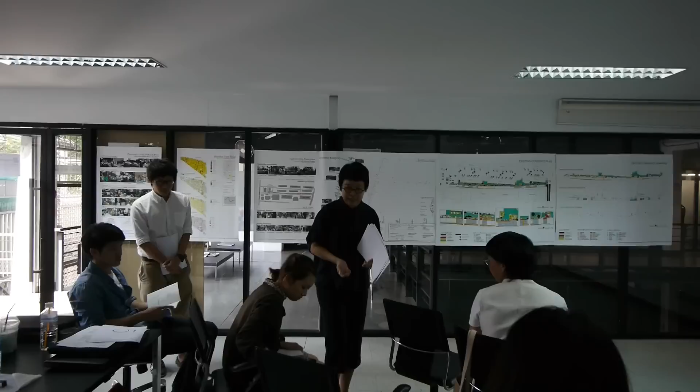Morning, everyone. Today I would like to present my project, which is domesticating the exterior space, where domestic life is going to share area or extend space.

I'm interested in the rich and poor, where high-income society has everything such as luxury life, but in low-income society they don't have that luxury life, yet they act as the main support to the whole society by doing jobs such as trash collector or motorcycle driver.

I found out that the best location for my idea is the Thonglor area, which shows so much contrast between high income society and low income society. There's a Thonglor police flat community located behind the police station flat.

It's located in between the two wall properties of Thonglor condominium and the police flat, which will be described later. You can see the atmosphere of the community, located in a strip line only 15 meters away from the main street of Thonglor, where you can see the activity they're doing, spending most of their time outside.

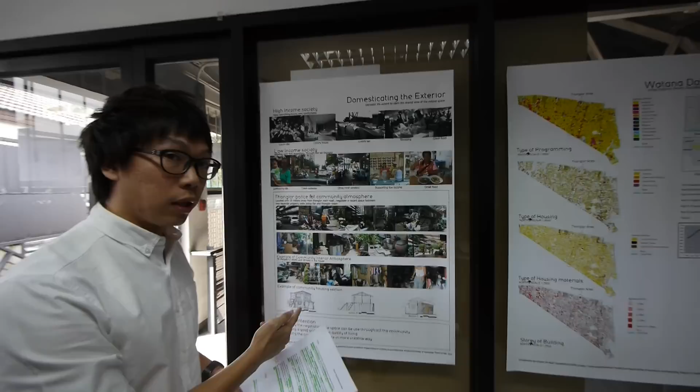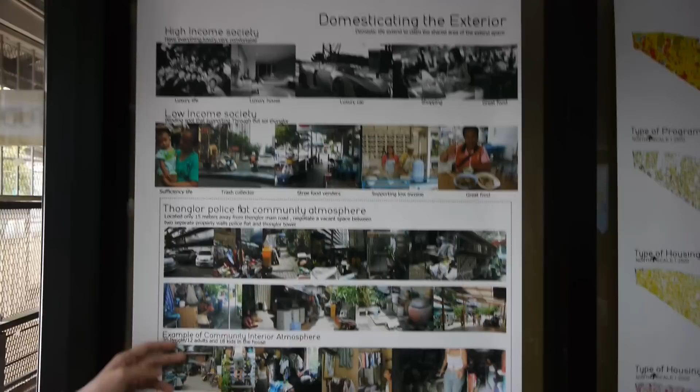This shows an example of the community interior atmosphere, where this house has 30 people staying inside, so they have to share the space within 5 by 4 square meters.

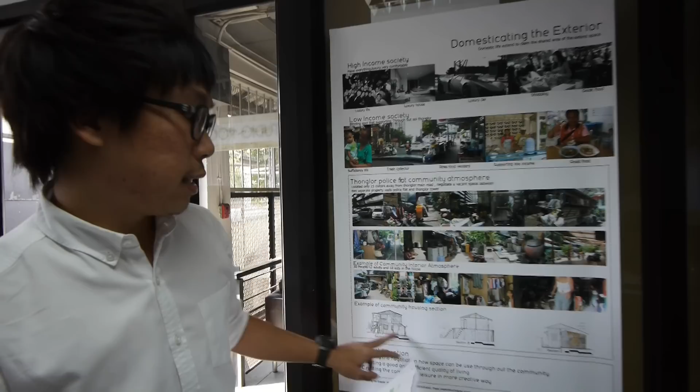You can see how the section shows the relationship between the second floor and the first floor as well. So my project's intention is to create a negotiation of how space can be used throughout the community, creating good and sufficient quality of living, and also creating the community architecture in a more creative way.

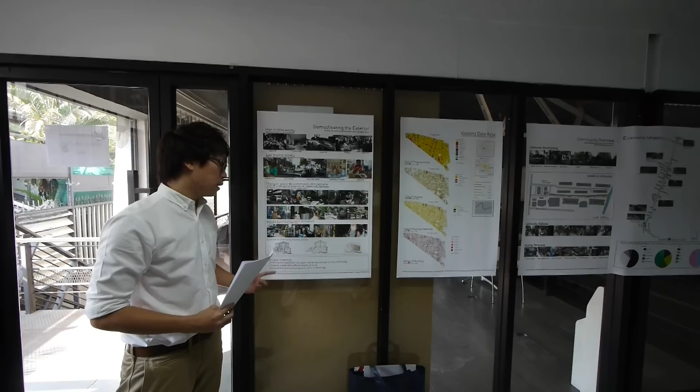The location of Thonglor is at the Watana area, which is fully built with concrete buildings, and also has a population of around 70,000 people.

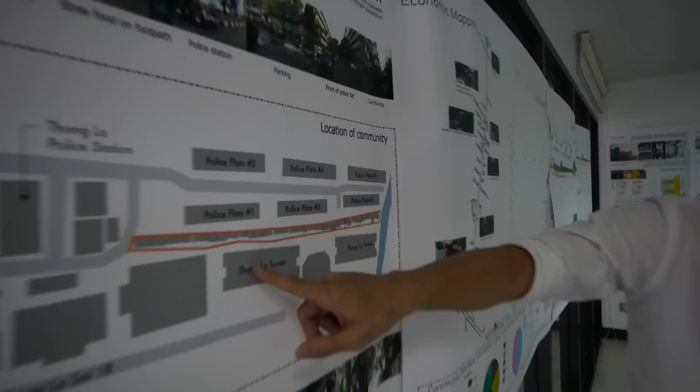Moving on to the community, which is located in between. You can see the police flat and the Thonglor tower. The location of the community is situated between both walls, standing on their own.

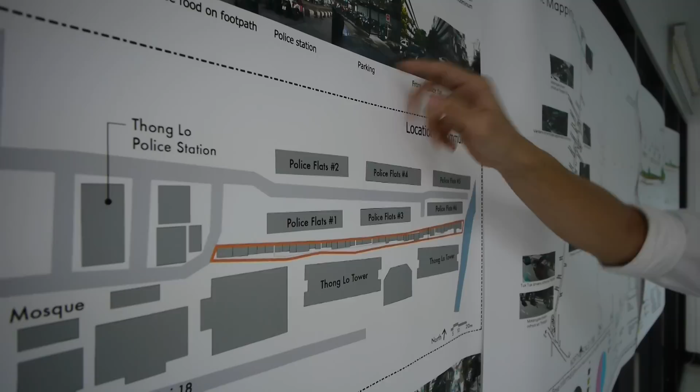This is the main road, the street footpath, police station, parking, and front of the flat. The community is located behind the flat area, and you can see here the exterior space that they claim as their own.

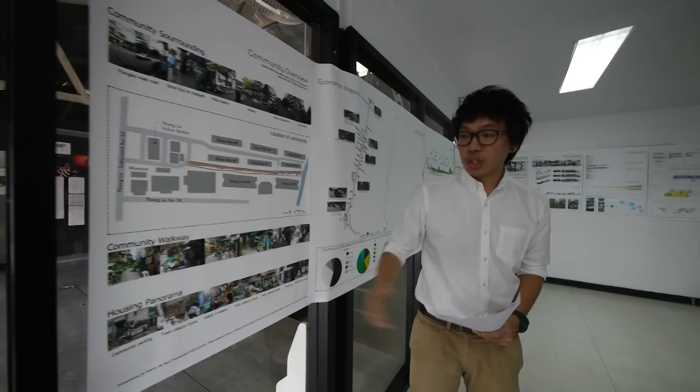The housing panorama shows the creativity of using recycled materials as the main building material. The people in the community have so much potential within the site, where they actually support the people in the community.

Such as motorcycle drivers, food vendors, or car drivers. I also did a questionnaire with the community people, asking their name, age, occupation, type of job they're doing, distance of work, and how much time they're spending outside of the house, in front of the house.

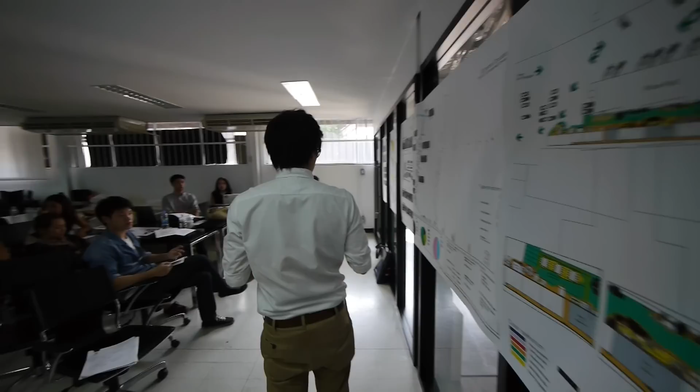This basic information shows a database where most of the occupations are food vendor or motorcycle driver, and the dominating age is around 0 to 24 years, with the dominating gender being female.

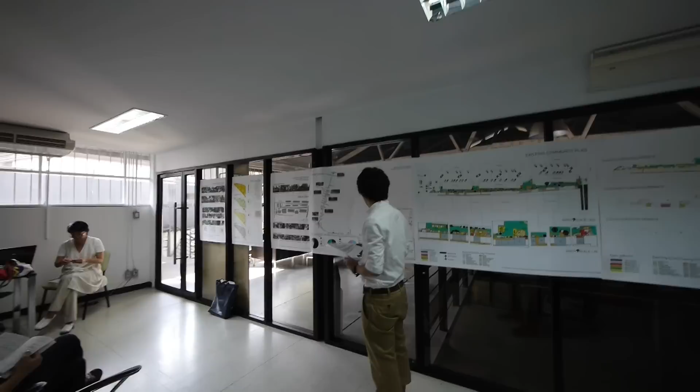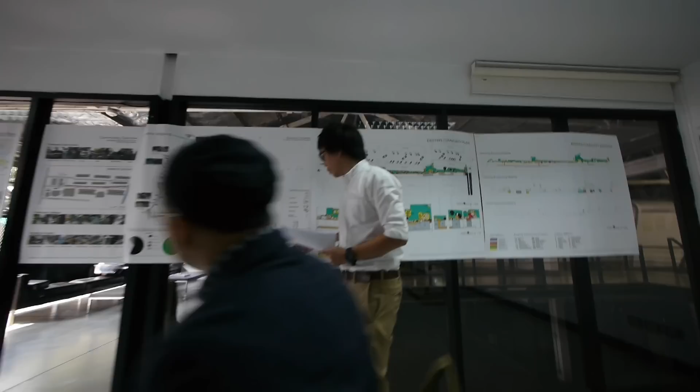The questionnaire information shows that people spend an average of 9.6 hours inside their house, and 2.7 hours per day in front of the house. The top 3 activities inside the house are watching TV, playing computer, or sleeping, and the top 3 activities in front of the house are washing or drying clothes, looking after kids, or chatting.

This is the existing community plan, showing all the exterior spaces located in the community.

You can see the community is located between the soft boundary and hard boundary, where the soft boundary is the flexible boundary people use as an entrance. There are 4 main entrances located in between the blocks, and the green area represents the semi-private area.

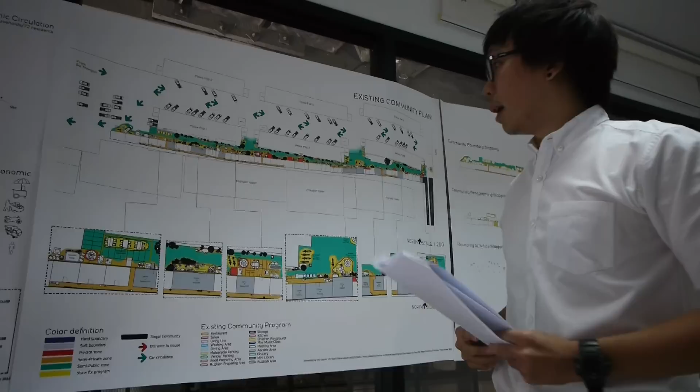The orange and red represent the semi-public, semi-private, and private areas.

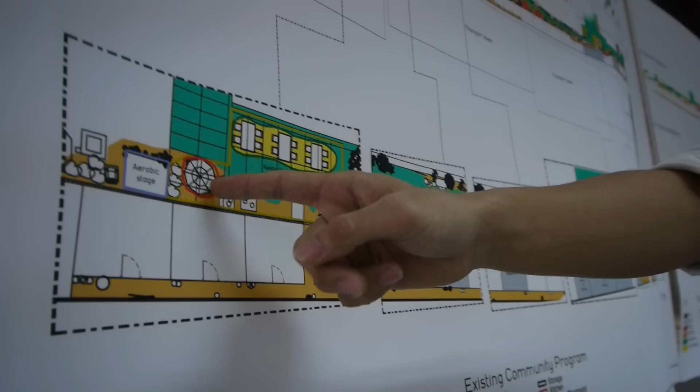In the zoomed-in view you can see how the exterior and interior become connected, by this owner of the house who claims the exterior as a restaurant, where she cooks her food and sells it to people on the other side.

And there's the trash collector, who goes out and collects all the rubbish and claims this space as his repairing area.

Another restaurant is owned within the community, as well as a grocery store for the community people.

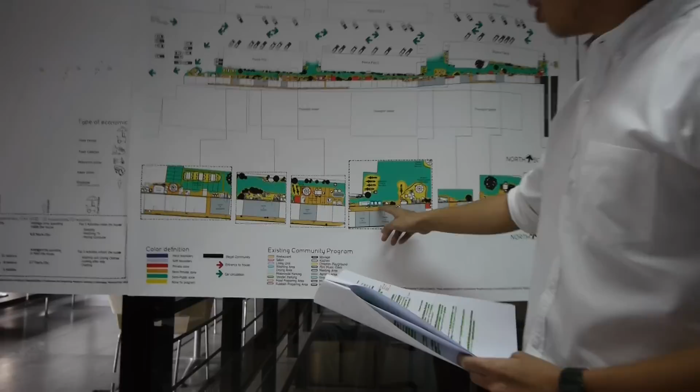There's also community service such as a washing area and another trash collector area, claiming the front of his house as the area for his activity.

Also the deputy head of the community looks after the whole community, and the owner of the grocery is here as well, where we set up the meeting area for the community.

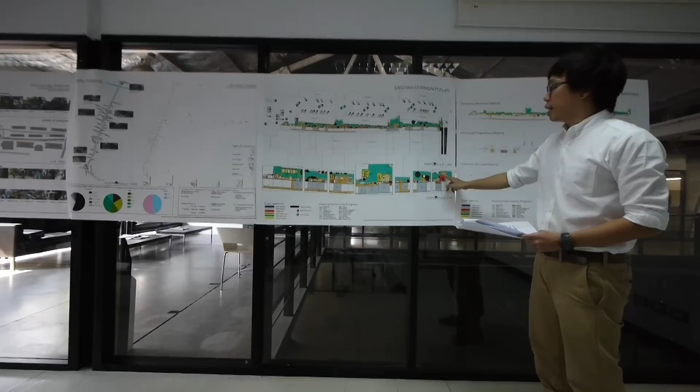The exterior kitchen owned by this house, where she's claiming the exterior as her own kitchen to prepare food to sell on the main street of Thong Lo.

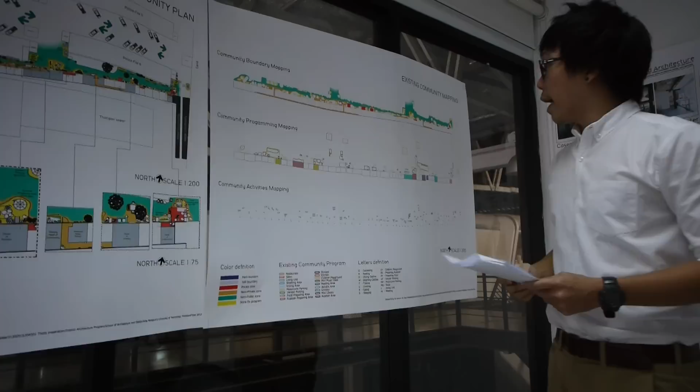The next one shows more clearly the boundary, pointed out in green, yellow, and red, where they're claiming the exterior of 55% of the whole community exterior.

Underneath is the program mapping, showing the overlapping of programs in the area, which points out that the most overlapping program is located near the junction or entrance of the community, similar to the activity mapping as well.

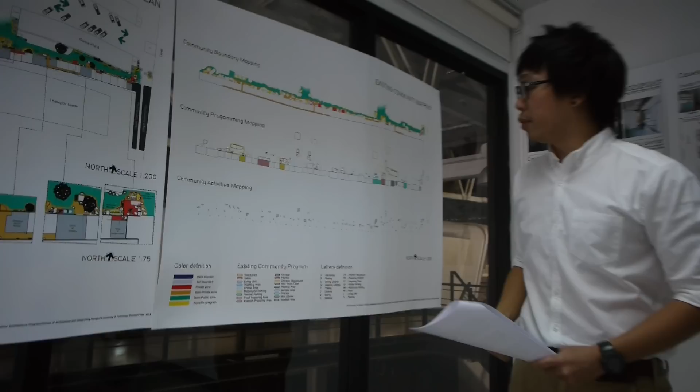So as you can see, there's so much potential happening on the site, and my intention is to redesign, recreate, or organize the exterior for the community in a creative way.

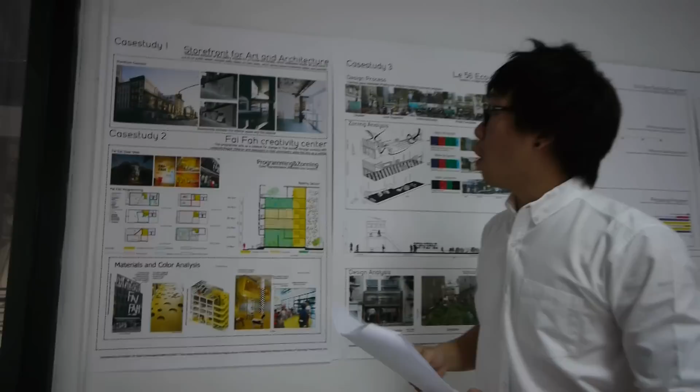I looked to case studies, where the first one is the Storefront for Art and Architecture, which uses a hinge wall as a furniture that can be turned into a table or a chair, also changing the space between interior and exterior and how it's connected.

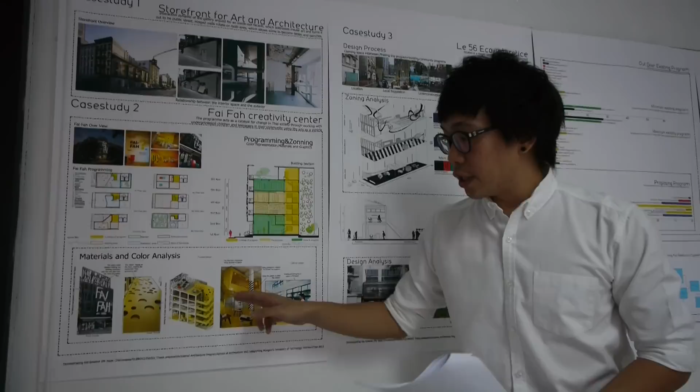The second one is Fai Fah Creativity Center, where they use art as a vehicle to push the children forward, using color as the representative - for example yellow representing energy - and they use color to frame the zoning inside the interior, which is interesting for me.

The next case study is 'Le 56', located in a high density area, a formal passage where local people have a part in the design, starting from suggestion, under construction, and project development.

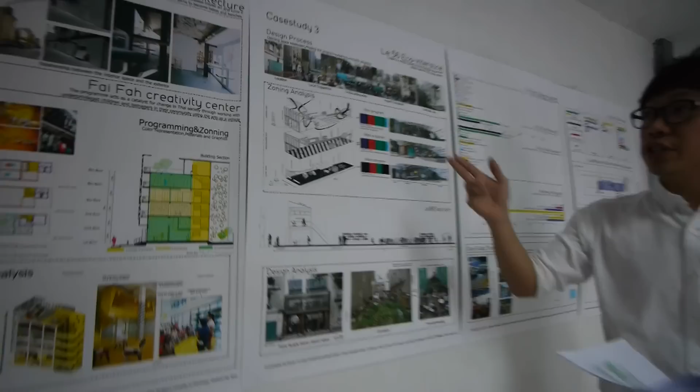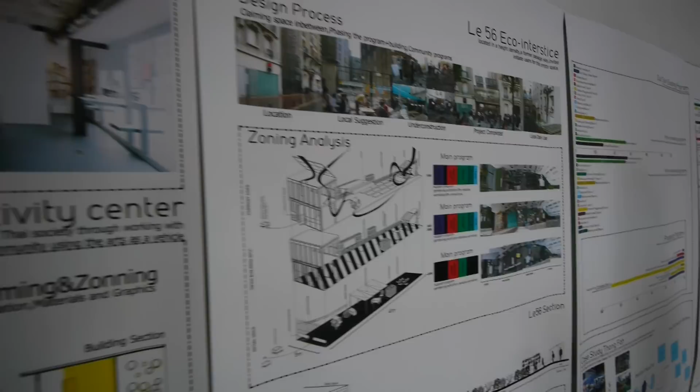Developing from 2008, where the main programs were just the meeting area and garden area, the designer decided not to put the meeting area too much to the front so it wouldn't get disturbed from outside, but set it almost in the middle, so people from outside can still see people doing activity inside.

This shows the zoning into public, semi-public, semi-private, and private zones that they set up.

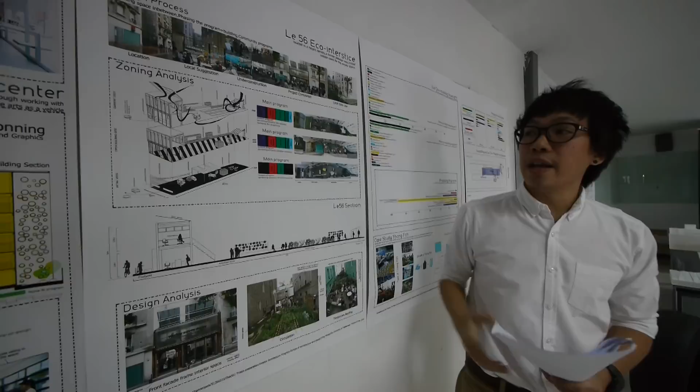Over time, more programs were added, such as a lab located at the front, and toilet and storage at the back.

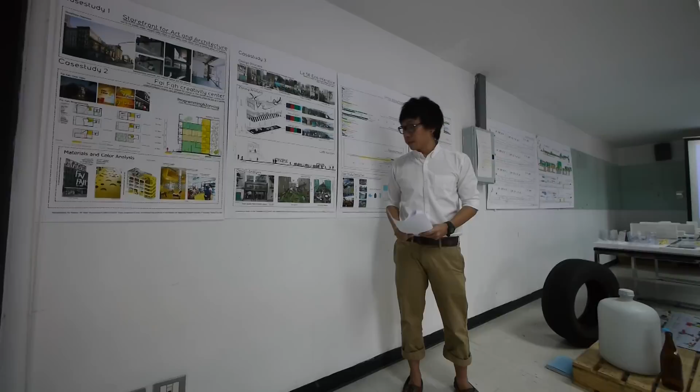You can see the connection of the program overall, where they set up the facade to frame the interior space, setting up circulation into foam-made circulation, using recycled material as furniture, and also providing temporary roofing for the people inside.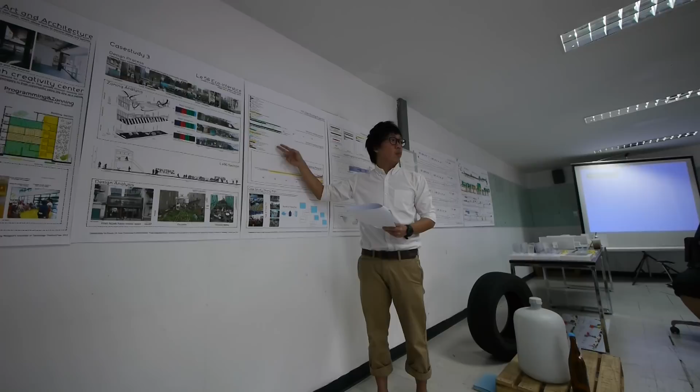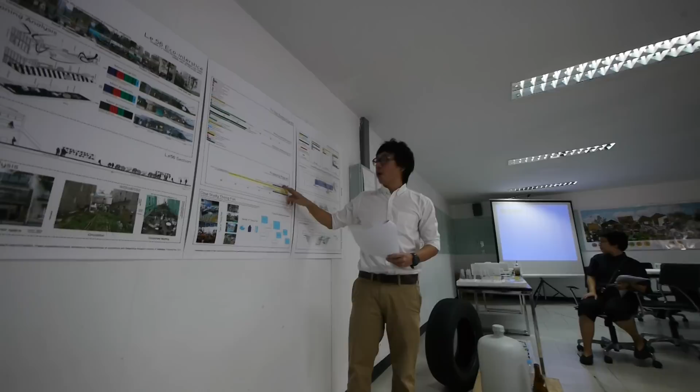This links to the proposed program, which I got from the questionnaire I already explained - what they actually want or need is the blue flag market and playground for children, because of limited space in the community, plus a daycare or community workshop they can improve, which links back to what the Thong Fah or blue flag market is.

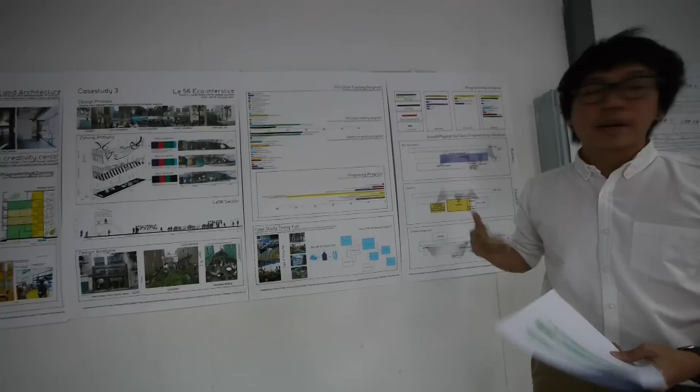It's a symbol that is stuck in front of products approved by the government, where they sell products cheaper than the normal price, by 5 to 10%.

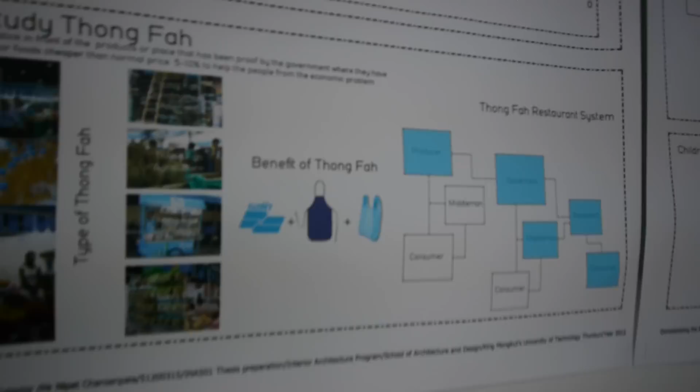It's divided into 4 main parts: Thong Fah construction material, Thong Fah agriculture, Thong Fah restaurant, and Thong Fah corner, where the one the community wants is the Thong Fah restaurant.

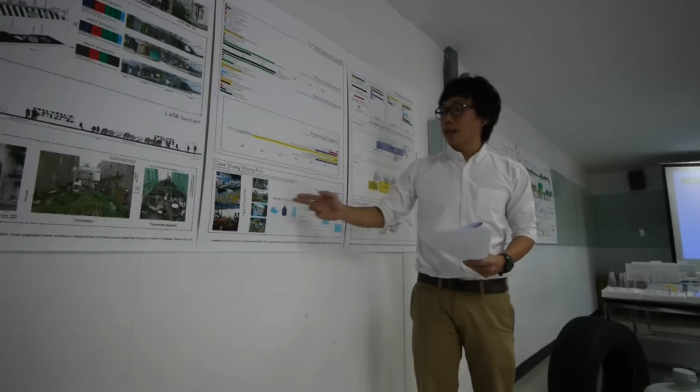The benefit is that they get the Thong Fah flag to prove they are up to the government's standard, the plastic bag, and the cheaper price by buying products from the government.

The process works from the producer to the government, then the government passes it on to the middleman or the restaurant, and then to the customer.

I'm trying to group the program into 3 main parts, the first one being the business zone, fully with the restaurant and blue flag market.

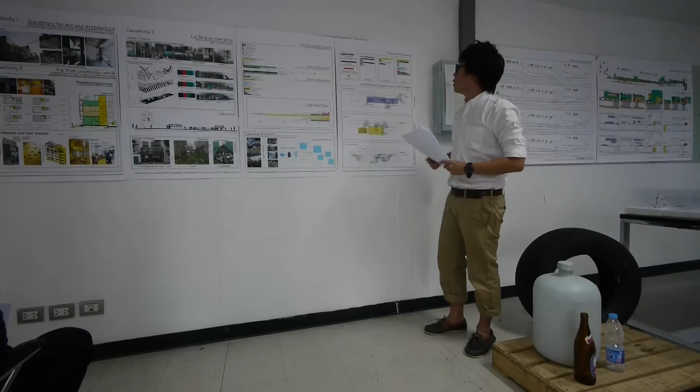The second one is the education zone, such as the daycare, library, community workshop, music class, and the service area for the community, such as children playground, meeting area, or the kitchen for blue flag.

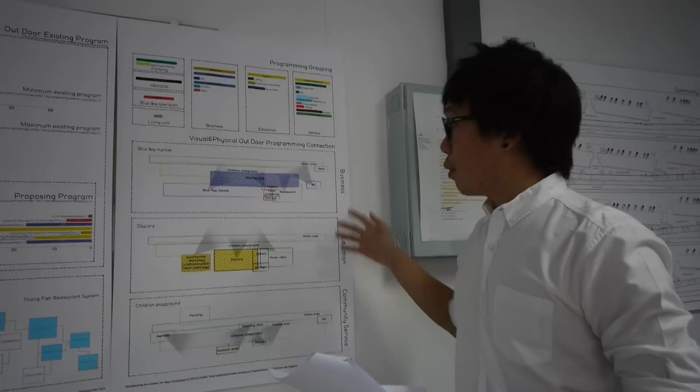I try to group the programming connection by setting up 3 main ones: the first is the blue flag or business area, where the blue flag market and restaurant can share the dining area together, which can also look throughout to the children playground.

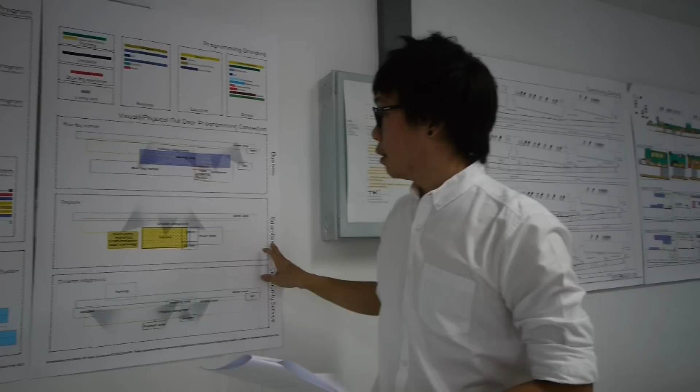The second one is the education area, where community workshop, daycare, and music class can share the children playground together, because the community is full of children.

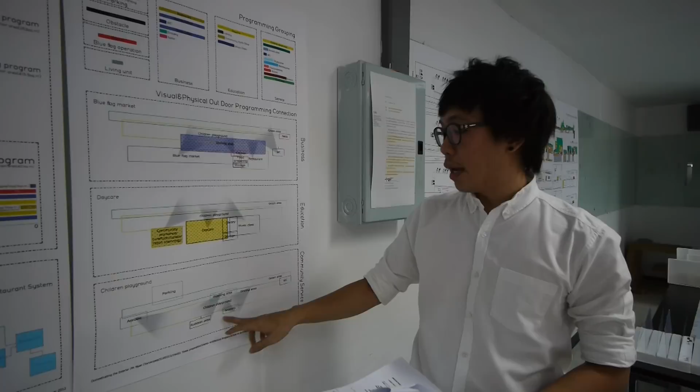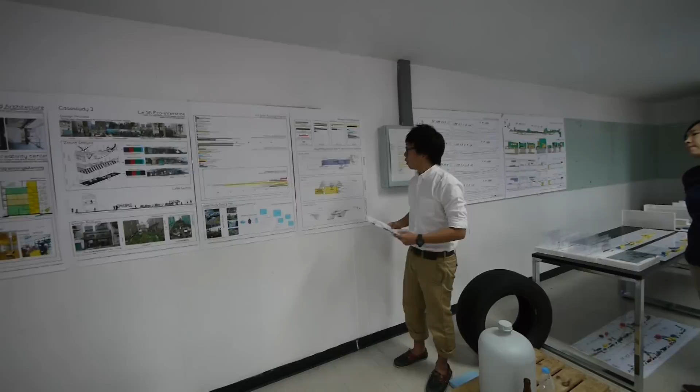And the last one is the community service area—you can see the rubbish area, grocery, drying area, washing area, and the parking area—also looking at the children playground. So what you're seeing is that the children playground can connect to other programs and can be the solution for helping or be connected with the other program, which I'm trying to set up.

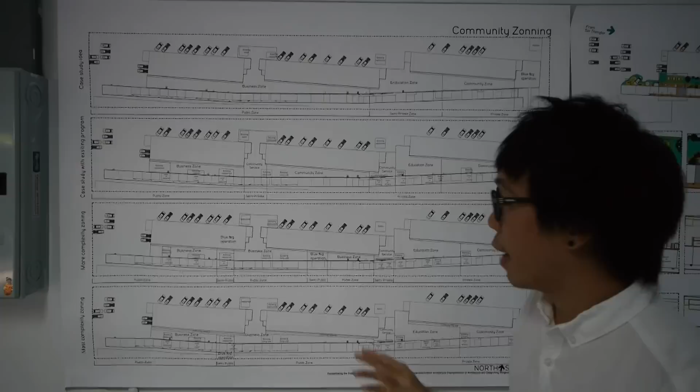The zoning uses the case study and locates the zoning the same as the case study for the first one, and then starts to develop by adding the existing program inside. We're setting up the public zone for the blue flag, and the semi-private and private area for the community, adding more complexity in terms of blue flag operation, such as the kitchen in between the program, so it's easier to transfer the food.

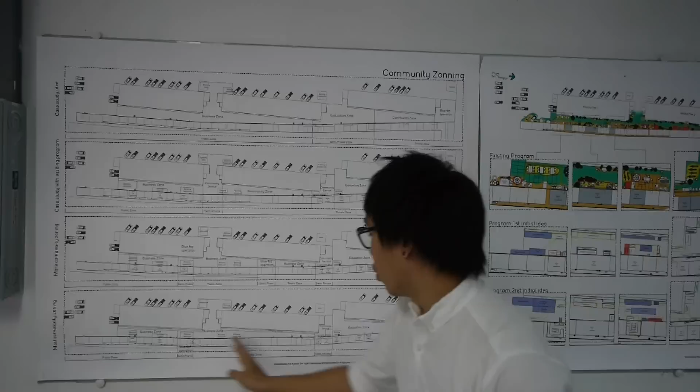And the most complex one is locating the community service all along the community, so to provide it to the whole community, coming up with the solution that the community service will be supporting along the community line. We are setting up a public zone, semi-private, and private zone for the community, where there will be an education zone, community zone, and blue flag operation zone.

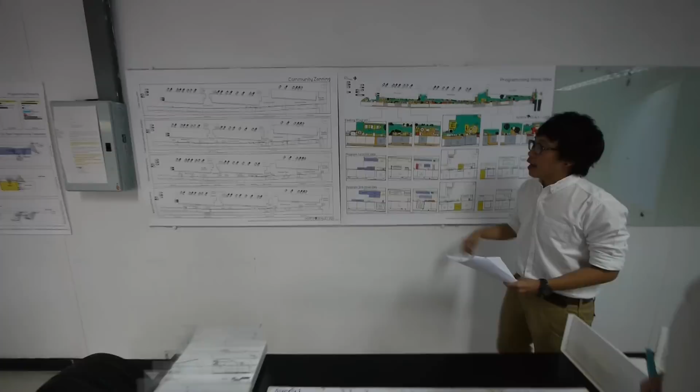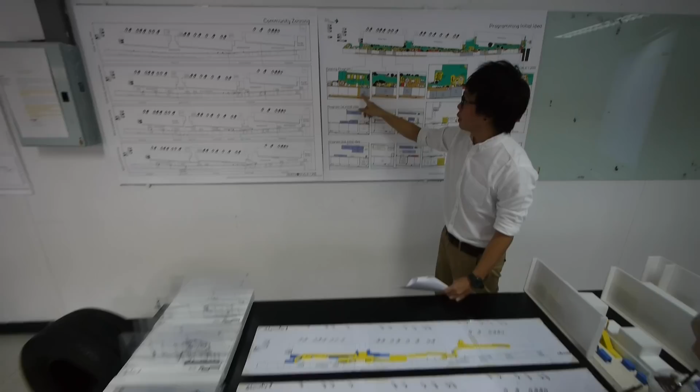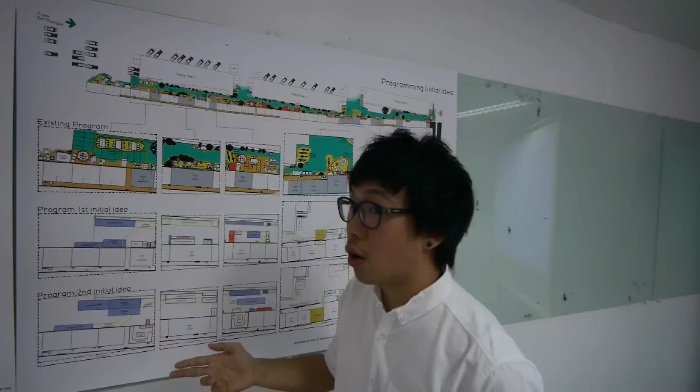Here I take this one as an idea to develop further in the existing program located inside, such as the restaurant that will be claiming this space as her personal space—this is the owner of the restaurant. So I claim more of the blue flag into the community, and claiming in front of her house as a restaurant, sharing the dining area together.

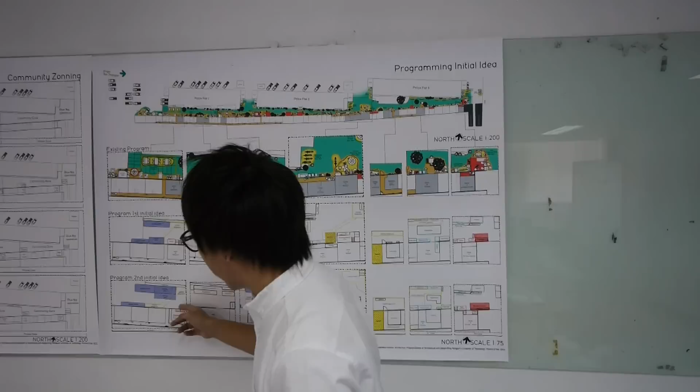For example, the rubbish area: claiming this area as the community service area, adding the children's playground or the blue flag market. But the one I'm interested in is this, so I'll explain more—claiming more of the blue flag into the side and locating her own restaurant inside her house, which you can see in the schematic design. The first one will be this one, showing the connection of the community service or children's playground all along.

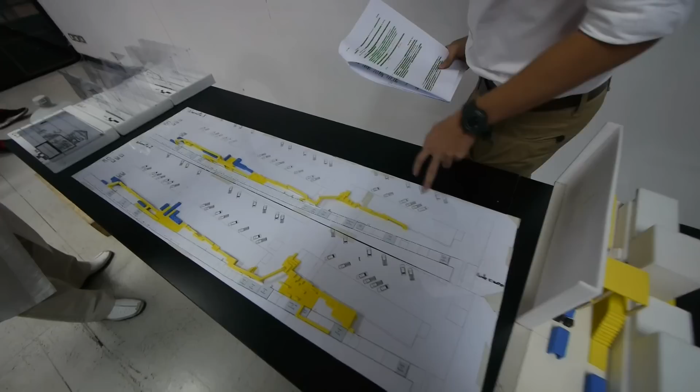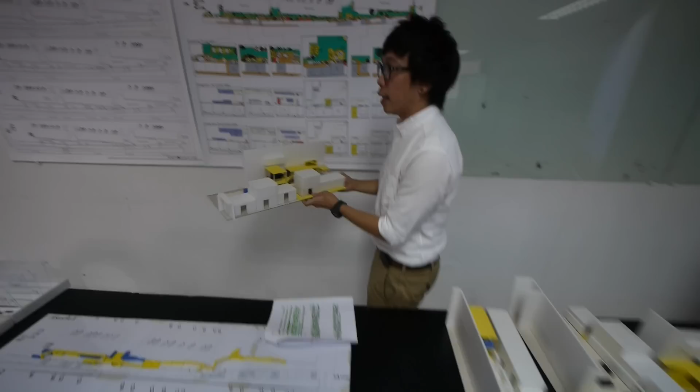And this is the second one I selected, where the children's playground goes deeper into the site. This is the zoom-up where you can see the front of the design, where the children's playground takes the whole place, and the interior will be seen inside as well, which is the restaurant. You can see the connection where they can have the dining area underneath and children running up along the community.

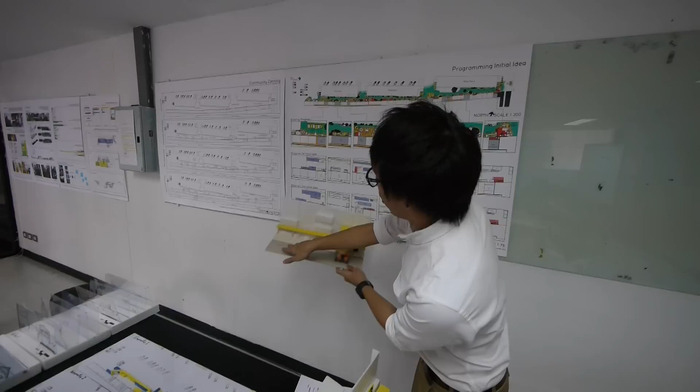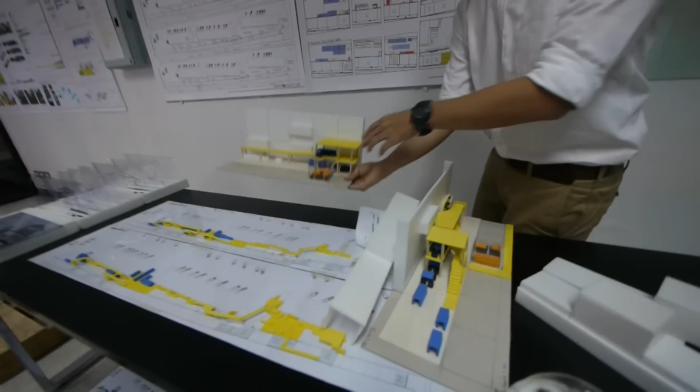And the other one is this area, the rubbish area, where you can see there's a connection—the owner of the rubbish can prepare his rubbish on the other side, underneath the playground for the children—and claiming this area as a blue flag as well, where the restaurant will be located underneath or inside their house, which is the two-story house.

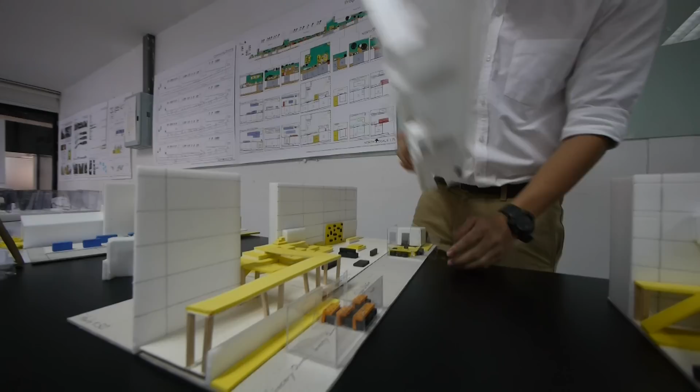And this is the education zone, where you can see the connection between inside and outside. It's located with the working area for the community workshop, the playground for the whole community, the daycare for the children, and the music class, which are connected by the children's playground.

And also at the back is the community area. You can see where they're setting up the second floor as the playground as well, and they're providing the blue flag operation outside instead of having her own private kitchen setup inside.

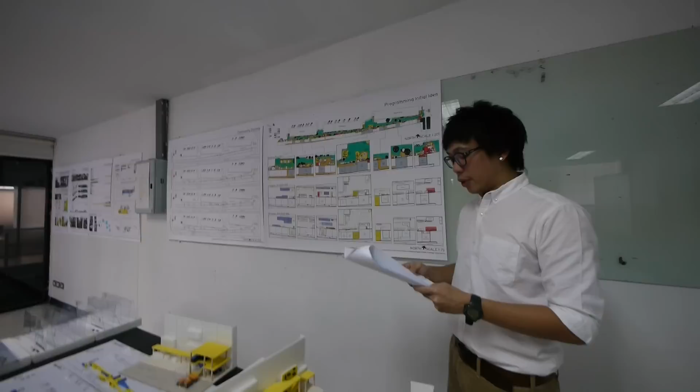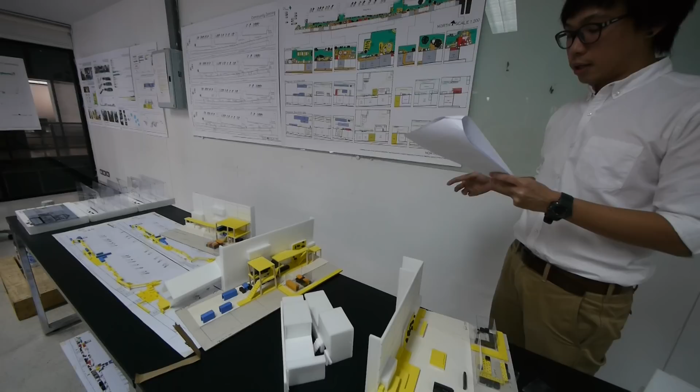Which links to the idea that this is my intention: to create the connection to the community, where the need comes from the community, as shown from the questionnaire. I want the space to become a more sufficient quality of living, and the children's playground is not for an individual, but for everyone in the community. So the project will be running as time goes by. Thank you.

I have a quick question.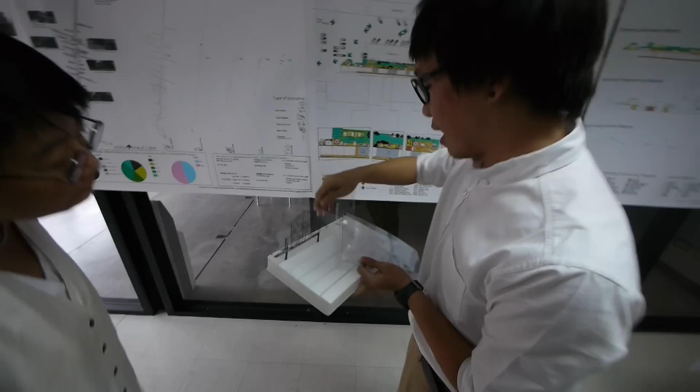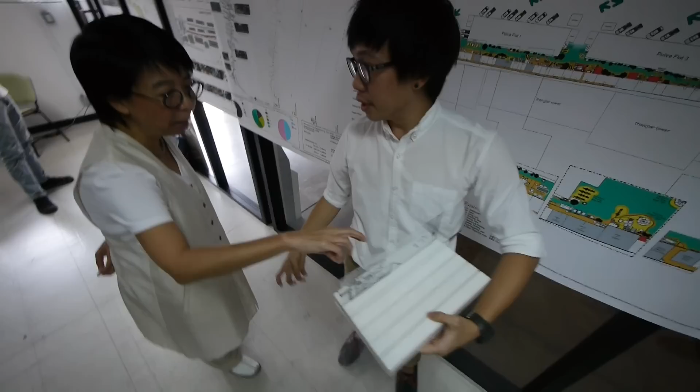So you can see in the section the changing of the space where they're claiming the space. So it's a two-story. Yes. And it's being built individually, by the individual owner. And it's like connected or touching each other—kind of, with a little gap. Yes, with a little gap.

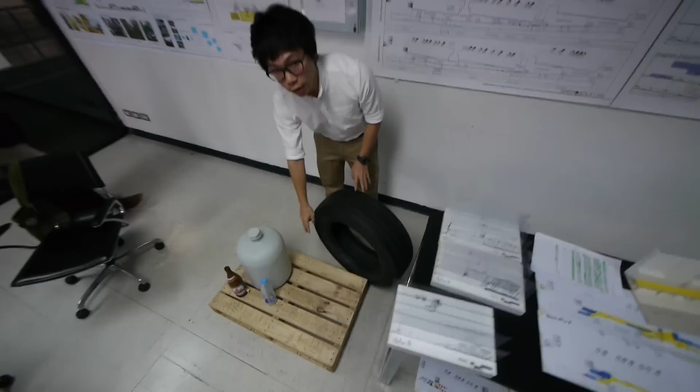Which is the main point—I'm going to use recycled material, such as tire, pallet, or bottles, using three main colors. The yellow will represent the children's playground by using the pallet, the blue flag will use a kind of fabric or canvas, recycled, and for the black color I'm selecting the tire or soft material.

It will be the connecting between the hard surface and the fabric one, which will be adding, as you can see in the model, in between both.

Can you summarize the concept of the blue flag in a few sentences, please? What is a blue flag, and what is related to what you're doing? I want to be very clear about it. Okay, blue flag is...

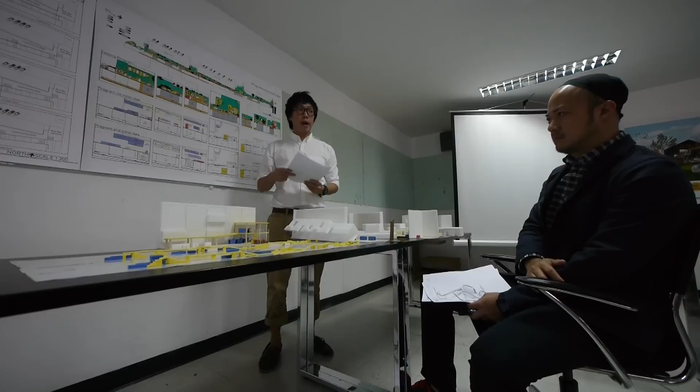The project comes from the government, where they're setting up to help with the economic problem. So they will sell cheaper food, where the people in the community actually want the blue flag into the community.

To bring outsiders to come eat inside, because it's cheaper than the normal price in the Thonglor soi.

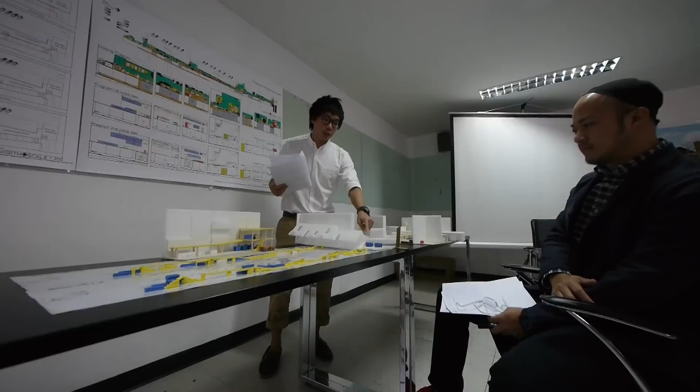So I want to add or put the blue flag market into the community, which is based on the need of the people in the community, which you can see will be located in between or inside the community.

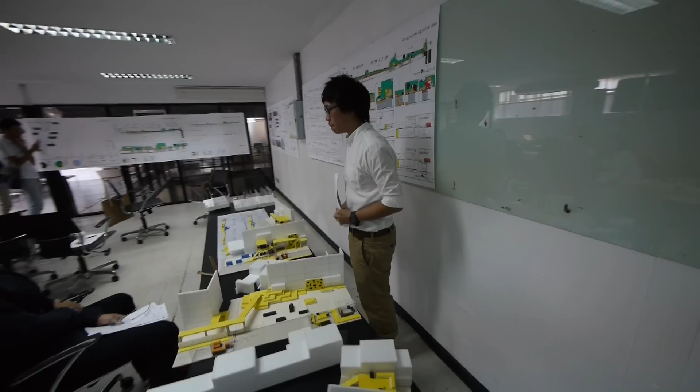Normally people park very freely with their motorcycles, they can park everywhere. Does your design deal with the way they park? Well, I also thought about their parking as well.

Instead of parking in front of the house, they can park underneath, which you can see is a space underneath that they can park the vehicle as well. So we're claiming this space as the walkway for the whole community, as a main circulation.

So you limit only this part, right? No, they can go anywhere. But mostly people will park in between or at the entrance of the community.

Because this question is about when you design a community, one important thing you have to consider is what they were living before. Yes, because they will do whatever they used to.

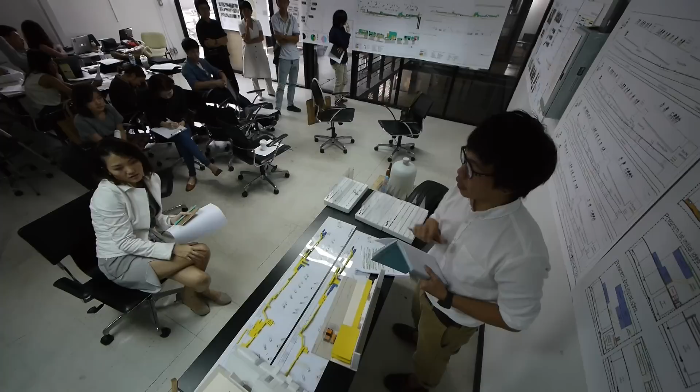Right now I'm still keeping every existing program that they are doing, so it's not disturbing. But adding the children's playground is for everyone, not for individuals, so there won't be too much argument.

That's good. And one thing is the housing facade, right? This the flat, the police flat. But this already has some wall and balcony, right? And if you attach some part, have you analyzed it?

Yes, I kept a distance between the police flat and the existing balcony that comes out, the quality of it. So it's actually located with a gap.

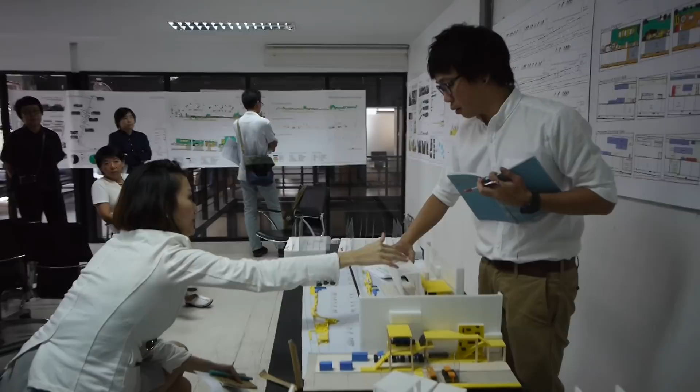So on that side it's kind of systematic, but from the housing of the community it's a bit out of order. How can you manage the order of the void, the wall of void of the window and things like that?

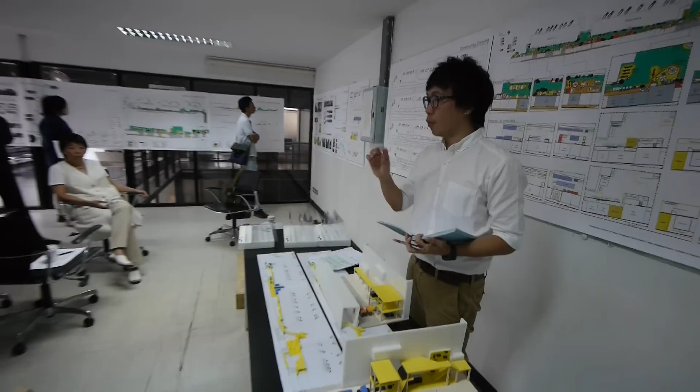For the house, yeah, it's from the panorama image that I took, where there's the door and the entrance, which is also showing in the plan, or the entrance.

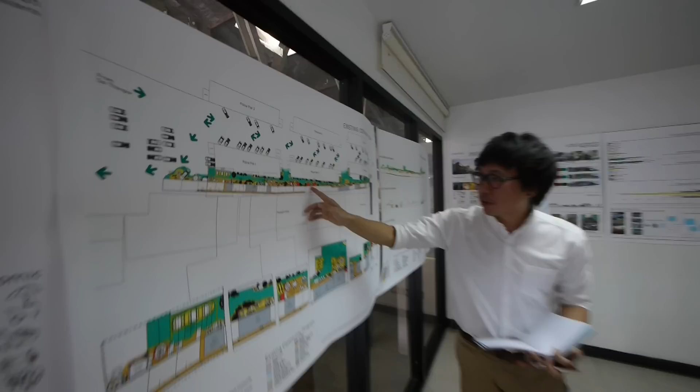They can enter at the front and go around to the back as well. Yes, and also you can see all the entrances, where some of them also have stairs, which can go up to the second floor.

The community is claiming the space in between the two walls, right? Because I think that's his first intention to look into. So it's very intense how they claim the space in between two walls.

And claiming the exterior to do their daily life activity, which changes the program in the interior. So the interior comes out to be the exterior program.

I think it's such a great project. Always fun. Maybe I will volunteer to help you.

No, really, I live around this area as well, and I really like the project a lot. I like your energy, yeah.

All the things you have prepared, even though it's so much information, and you had to talk very fast, because if you exceed 20 minutes, then Ajahn will cut you off.

But I mean, we're prepared, so even though it's a lot of information, I can more or less absorb and take it in.

I also like the fact that it's exterior, but it is an interior kind of set of concerns, elements that you have to deal with.